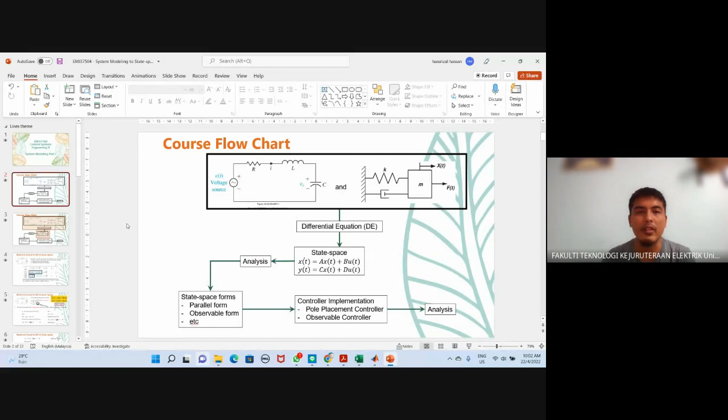All right. So last week, I can put it as system modeling part 1. This is the content that I will cover throughout the semester for my part. This is not included with Dr. Sitemani's part. And then after that, I gave you some examples for the electrical circuit, how to convert the electrical circuit to a differential equation, and then finally to the state space form. Then we went to the first example. This is the first order system.

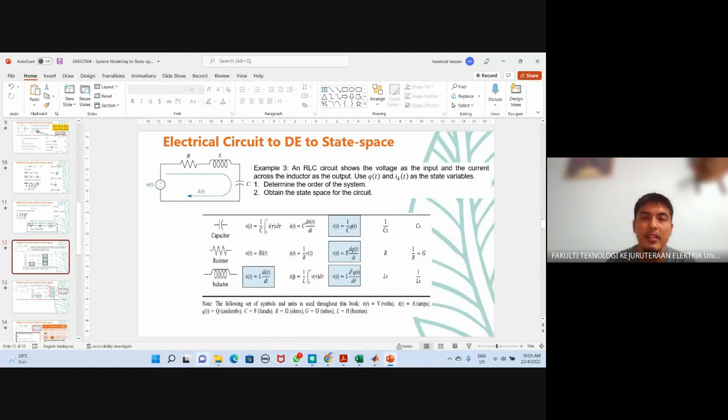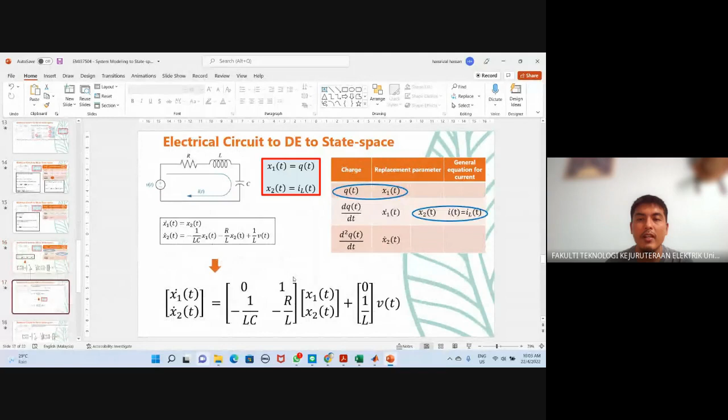And then I went to the second example, from electrical circuit to differential equation to state space. This is also a first order system. So at the end, we get this kind of state space equation. After finishing that, we went to the same electrical circuit, however, this is a second order system. So what does a second order system look like in state space form? You can see here how to convert everything. So finally, this is the answer: the electrical circuit to differential equation to state space for the second order system.

Then I proceeded with some exercises. This is the answer for exercise number 1, and this is the answer for exercise number 2. However, previously I uploaded the wrong answer scheme, so this is the correct answer for this exercise question. For how to solve it, I will upload in the Google Classroom. I also already uploaded the updated lecture slides in the Google Classroom, so you can find them there. Okay, so done for the electrical circuit.

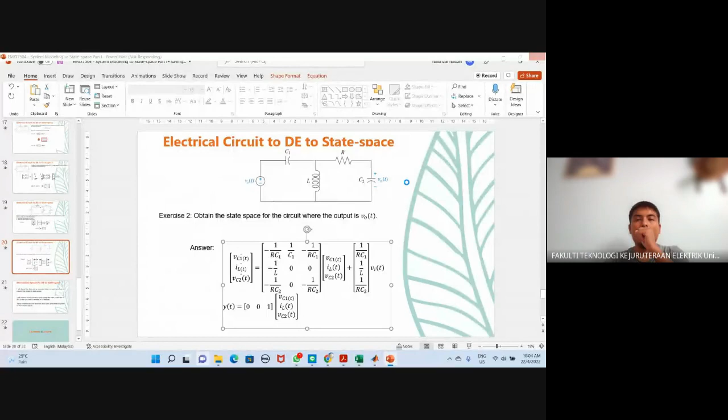This week, I would like to continue with the system modeling to state space part 2. So for system modeling part 2, we do the same thing, similar to the previous week. However, only the system is different. Previous week, we used the electrical system. In this week, I will proceed with the mechanical system with some examples and exercises.

So what have we concluded in the first lecture? In this chapter, the student will learn about the state space structure. I believe you are now familiar with the state space structure, which is x dot equal to Ax plus Bu, y equal to Cx plus Du. And what is the meaning of A, B, C, D? A, B, C, D are the matrices. X refers to the state variables vector. X dot is the differential of the state vector, and y refers to the output.

Then we go to item number 2, the modeling of the dynamic system, which is converting electrical and mechanical systems to state space form. Last week we already completed the electrical part, so this week we will continue with the mechanical part. I believe we can settle everything in the second item by today. Next, we will continue with the signal flow graph of the state equation, and finally simulation of the model system in MATLAB Simulink.

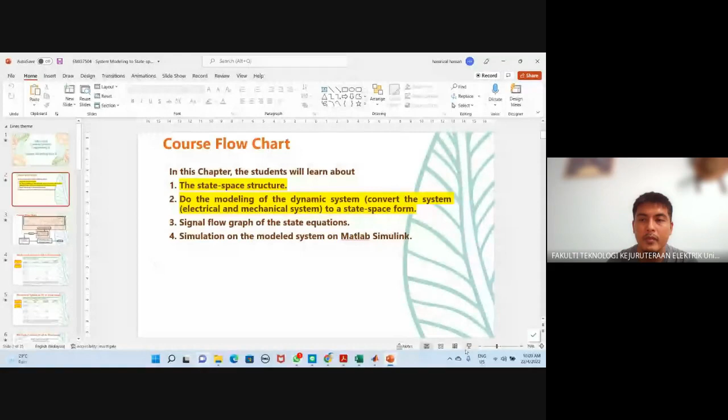Okay, so we focus on item number 2, mechanical system to state space form. This is what we need to cover for today, and this is the area that we want to cover. This was last week. This week, from mechanical, we convert to the differential equation, and finally obtain the state space.

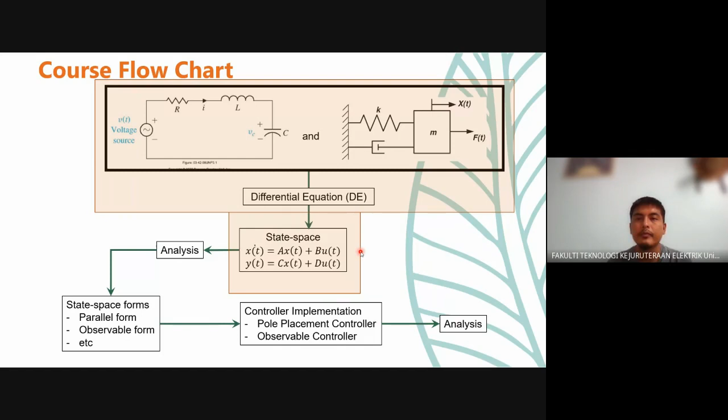Okay, so to solve or obtain the state space equation for the mechanical system, you need this table. This is the force velocity, force displacement, and impedance relationships for spring, damper, and mass. If you have a question about the spring mass damper system, you need to use this table in order to answer the question.

All right, so this is the formula we want to use regarding this table. I would like to ask... let me log in with this one to get the name. I want to ask Suman.

Suman, according to this table, which one do you need to use? Either force velocity, force displacement, or impedance, in order to obtain the state space equation. Just give me something based on your understanding of state space. What do you think? Either force velocity, this is number one. Force displacement is number two. And finally, impedance, number three.

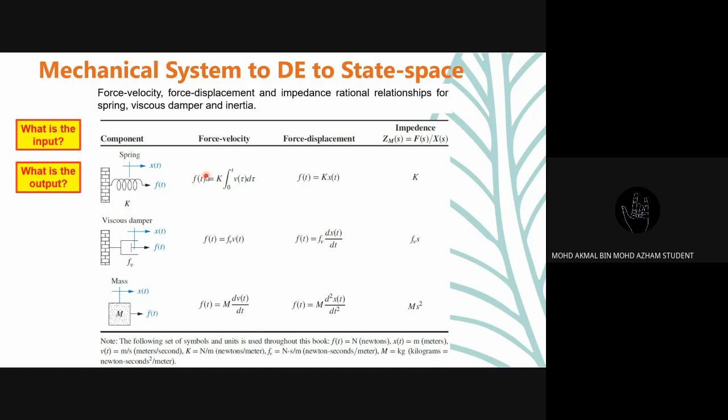Must always stay like this. However, if you give some force to the spring, you can see the spring is moving or stretching, maybe in millimeter or meter. How much is it moving? That we call the displacement, from the current location moving to the new location. And this is the normal length.

However, when you put the force, it changes. The length is changing, so how much it changes from the normal to the current length, we call as xt, or we call as displacement.

So based on that, this is the force. If you give some force, how much the force value depends on xt, and also depends on the k value. So you can see that this is xt. When you derive xt, differentiate xt, so it will give you what parameter?

Anyone? If you have xt... velocity, that's correct. So this is velocity, and this is referred to as acceleration. So this is the connection: xt, dxt over dt refers to velocity, and d square xt over dt square refers to acceleration.

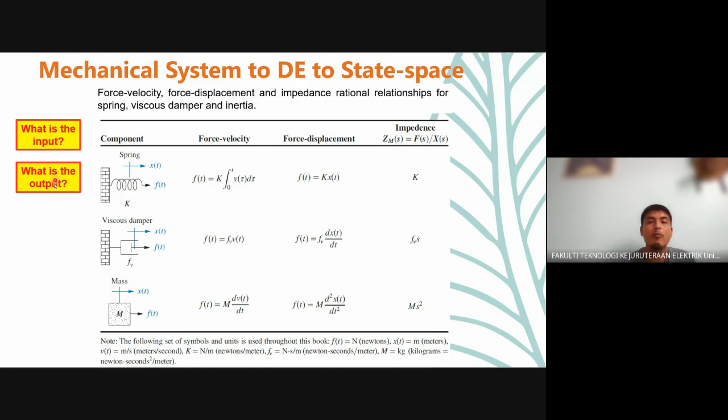So now you are clear that when you have this kind of question, you know the force is the input, and the displacement of either the spring, damper, or mass, that we call the output. All right. So similar to the mechanical system, to differential equation, to state space.

So this is our second type of mechanical system. I believe you know the answer. When you have this, the thing you need to use is the angular displacement. Torque angular displacement, all right.

So in this case, we look at the spring part. Spring part here, all right. So I would like to ask Koh Teng Sheng, which one is the input, Koh Teng Sheng, regarding this spring?

TT. Yeah, so normally if FT is the force, then TT, what is the name of the parameter? Torque. Okay, if anything involved in the rotation, the input that we give to any rotation, the name is torque.

And then, I believe if in rotation, the changing from the current to the new position must be in the theta angle, is it? So theta, the angle, is the output. This is the thing you must be clear about before you proceed to convert from the mechanical system to the state space. I believe you understand that.

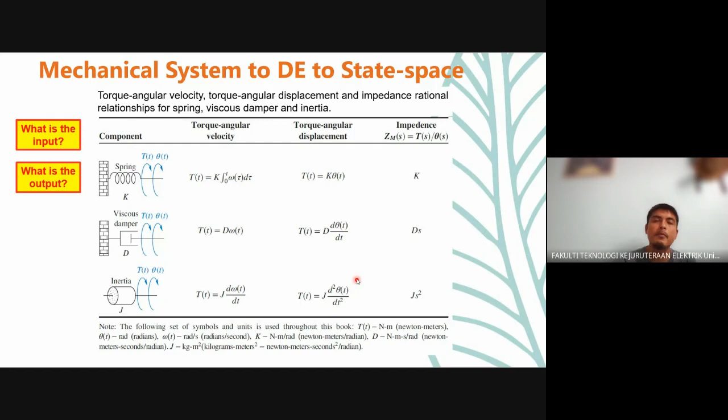So this is similar. If this is theta, the angle, how much the angle changes after you give the input to the system, the input is torque. And then for the damper, this is the angular velocity here, and this is referred to as the angular acceleration.

So now we go to the first example. This is the spring mass damper. This is force, because force only applies in the linear direction, so that's why we call the input a force.

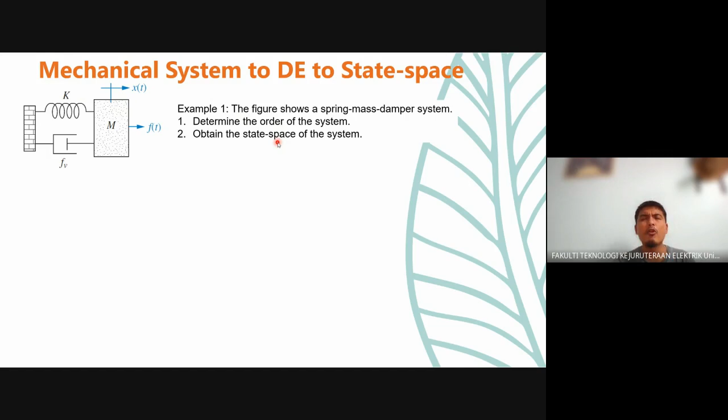So the figure shows a spring mass damper system. Determine the order of the system. So how do you want to determine the order of the system? And then the second question: obtain the state space of the system.

Before we determine the order of the system, we must know we need to use this table in order to solve, or design, or convert our system to state space. So this is a spring mass damper, and we know that we need to use the force displacement formula.

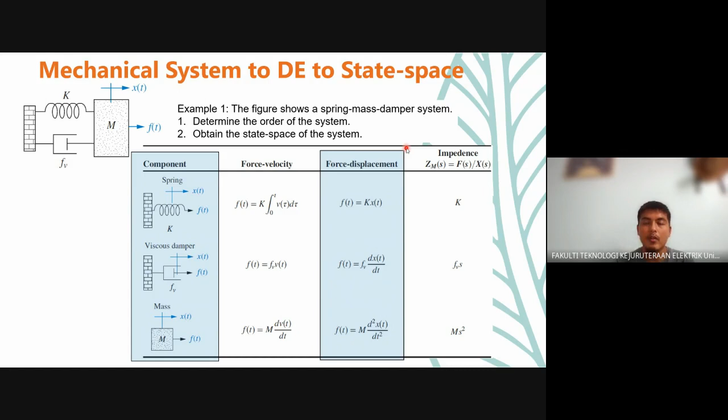So after that, we shortlist the formula, same procedure as the previous one. After we shortlist the formula, you look at the spring. We have spring here, we have damper, and we have mass.

And this is our target, to obtain the state space equation: x dot t equal to a xt plus b ut, and yt equal to c xt plus d ut. I hope you will appreciate this when I do the demonstration on Simulink later, then you will know, oh, this is the thing, it gives you what. I hope so.

So you have these three items here: M, K, and FV. So this is the thing, so how do you want to determine the order of the system? So you know that the input is the FT force, and then the output is the XT.

The order of the system is a second order system, since the highest derivative in the formula is 2. So for the mechanical system, you look at the highest derivative in the shortlisted formula. In this case, the highest is d square xt over dt square, so it means the order of the system is second order.

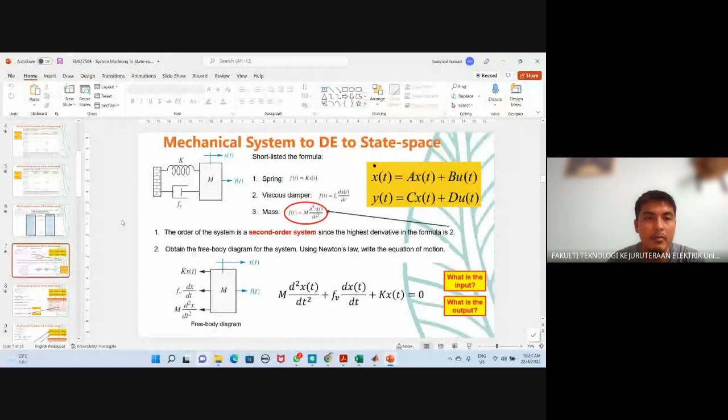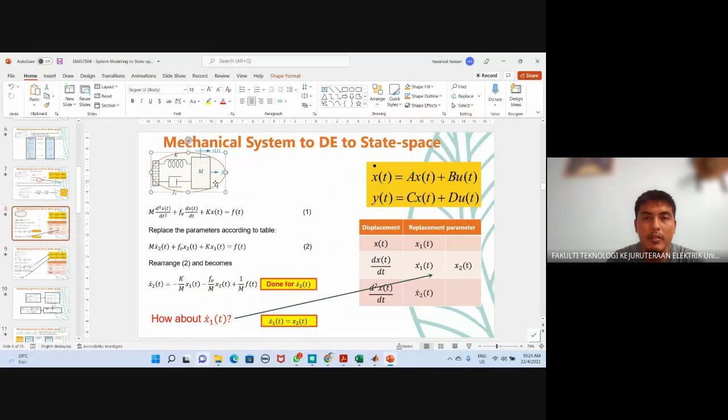Okay, so in this case I need to show you something. This one, not this one. Let me remove the animation for this one. Alright, so this is a question.

Firstly, this is the location of the force. The force attached to the mass. So in order to do the free body diagram, you need to find any items that attach with the mass, because mass is the place where the force is given. The force is given at the mass, then you need to find whatever attached to the mass.

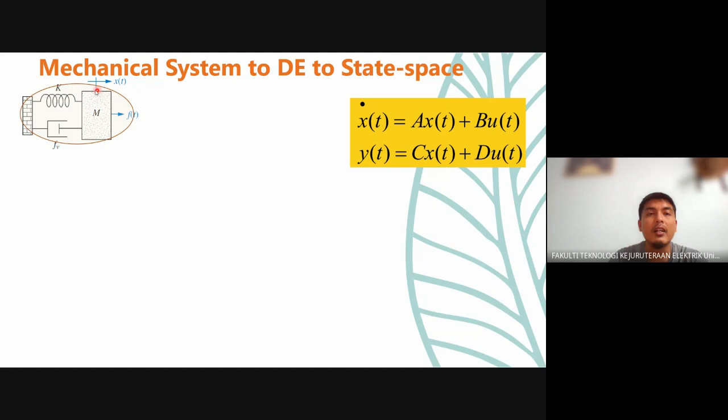In this case, the things attached to the mass are the spring and damper. So if you give some force to the mass, the spring and damper also will be affected. It's not only the mass that's affected, so it means the position of the mass, and also the position of the spring and damper, will change, because these two things are attached to the mass.

So that's why you can see that for the mass here, the mass, the damper, and the spring are affected when you give the input to the system. If you give input to the system here, the affected things are mass, spring, and damper.

So that's why this thing wants to make sure it returns back to the current position. That's the characteristic of the spring mass damper system, they want to return to their current position. So that's why, if you give force to the mass, the direction of the force for the spring and the damper must be opposite, because this force wants to return back to the current position. So this is how we come up with the free body diagram.

So based on this, according to Newton's law, we need to write this equation. The summation of the force equals zero according to Newton's law. So this is the force for the spring, this is the force for the damper, this is the force for the mass, and this is the force of the input. So that's why we get...

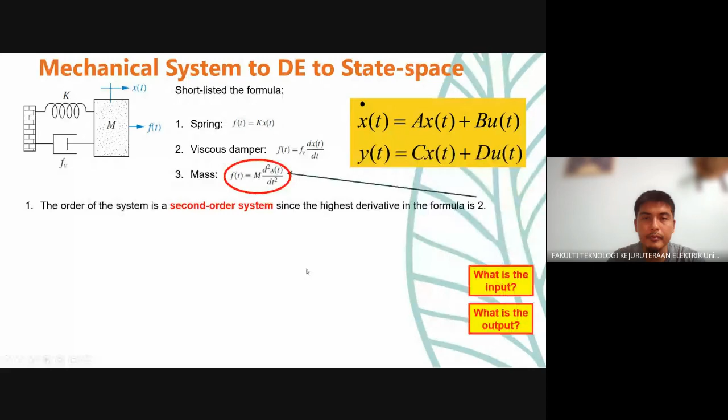No, this one. Actually this is referred to F equal to F, right? So you can see that the force of the mass here, plus the force of the damper, plus the force of the spring, equal to the force of the input. How many of them? 1, 2, 3, 4. So that's why we have 1, 2, 3, and 4. So this is the Newton's law of the force.

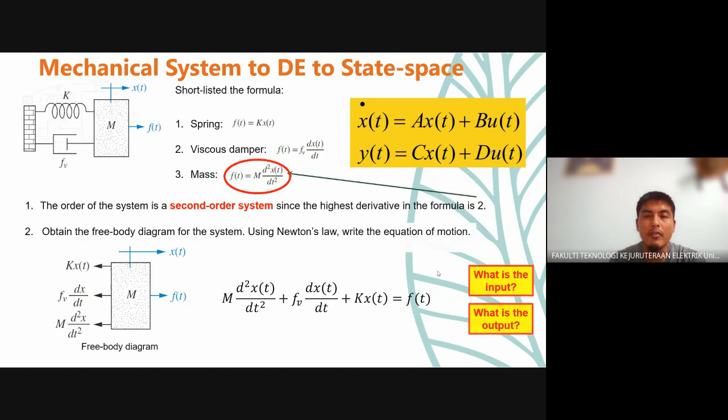Okay, so based on the equation, we need to replace the parameters according to the table you learned last week. So this is the parameter: you have xt, dxt over dt, and d square xt over dt square. And then after that, we just name xt equal to x1t.

And then after that, when we derive x1t here, that's why we come to x1 dot t. x1 dot t we can also name as x2t. And the x2t, when we do the derivation, up to x2 dot t.

So I would like to ask Ari Mugen: why did we not replace x2 dot t as equal to x3? Ari Mugen, what is your answer? Why did we just stop until x2 dot t? Why did we not replace up to x3t?

So, Ari Mugen. Are you there, Ari Mugen? Just answer yes or no. Godri, what's your answer, Godri?

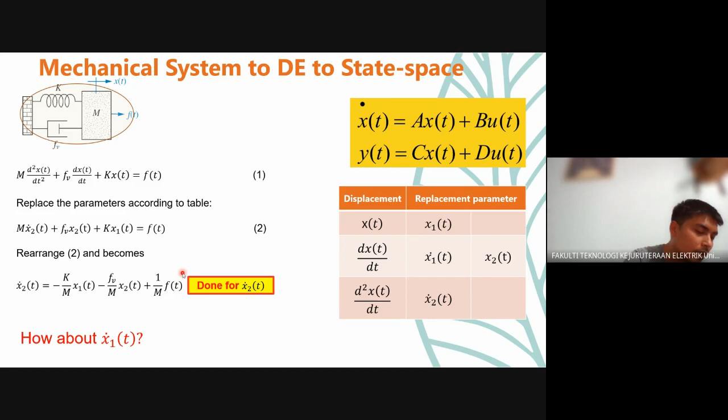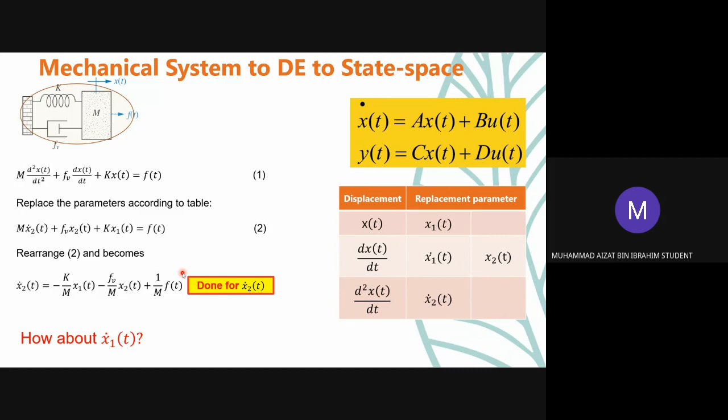How about x1 dot t? Anyone would like to guess what x1 dot t is equal to? Muhammad Aizat bin Ibrahim, x1 dot t equal to what, Aizat? X2? Yes, that's correct. How do you get x1 dot t equal to x2, Aizat? Based on the table, replacement parameter. Yes, that's correct. That's why this part of the table is really important, in order for you to obtain this one. So you get x1 dot t equal to x2(t).

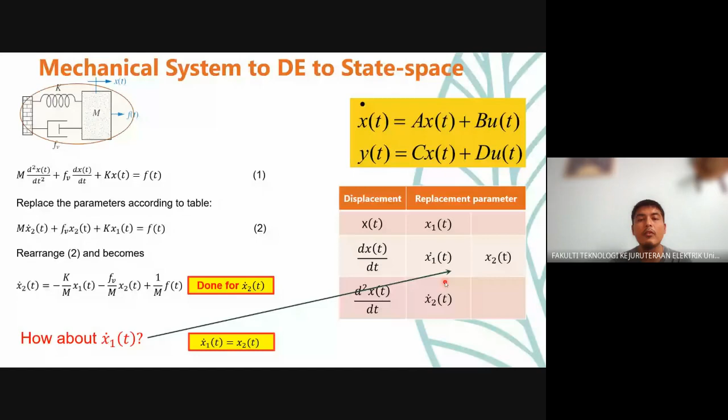All right. So according to this, x1 dot t equal to x2(t), x2 dot t equal to negative k over m x1(t) minus this thing, right? Then we need to convert to the state space form. So we have x1 dot t, x2(t) here. Since x1 dot t only equals x2(t), here becomes 0 and 1, because 0 multiplied with x1(t) becomes 0, plus 1 multiplied with x2 becomes x2(t), plus 0 multiplied with f(t) will be 0. So here x1 dot t equals x2(t).

All right. And then for the x2 part, negative k over m multiplied with x1(t) plus negative fv over m multiplied with x2(t) plus 1 over m multiplied with f(t). So this is how we convert from these two equations to a state space form.

And then from the figure, we know that the output is x(t). As you already know, before you answer the question, you must know what the input and the output are. The output is x(t). From the table, x(t) equals x1(t). So that's why we got y(t) equal to x1(t). So finally, this is our y(t) equation: y(t) equal to 1 multiplied by x1(t), plus 0 multiplied by x2(t) becomes 0. So we get y(t) equal to x1(t).

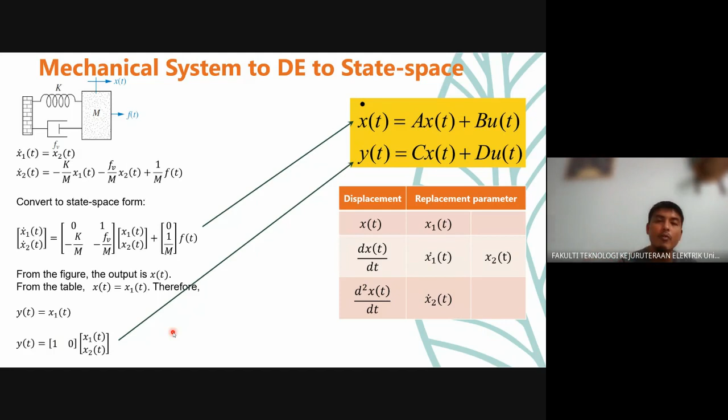Okay, so in conclusion, if you have a mechanical system you want to convert to state space: first, you have the mechanical system here, and you need to convert it to the free body diagram. After that, you obtain the differential equation. And finally, based on the differential equation, you compute the state space equation.

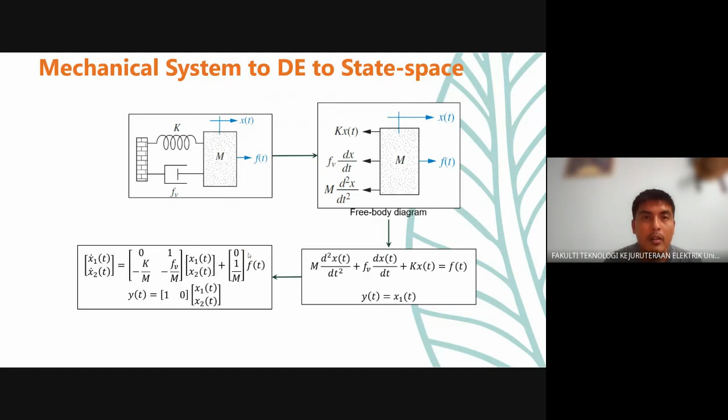Okay, firstly, you need to determine what is the input. Nurul Farhanah Nasuha, what is the input? Oh, you answer in the chat box. Let me check the chat. Okay, I just read your answer. Alright. Okay, Nurul Farhana Nasuha, what is the input for this question? Okay. Lavenya, what is the input, Lavenya?

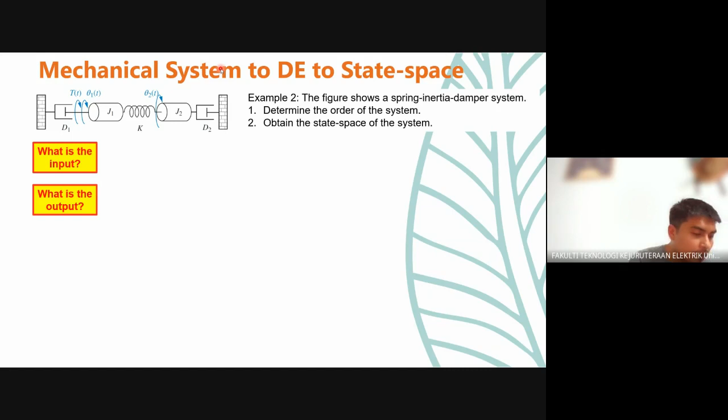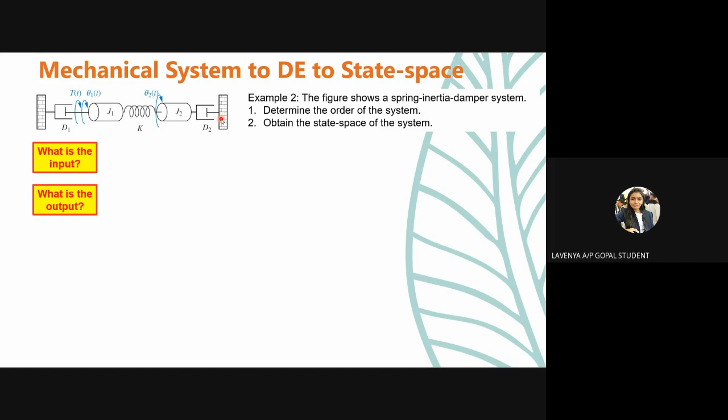Torque T(t). Yeah, that's correct. Okay, thank you for the answer. So the input is a torque, Nurul Farhana. Okay, so Lavenya, what is the output based on this figure? The theta. Okay, can you name it? Because there are two thetas here. So which theta, Lavenya? Theta 1. Do you have any output you would like to add, Lavenya? And theta 2. Yes, that's correct.

So in this case, you can see that there are two outputs here, theta 1 and also theta 2. Previously we saw only one output. However, in this example, you have only one input, but two outputs. So we can call this system single input, multiple output, SIMO. Okay, so this is really important before you proceed to answer the question.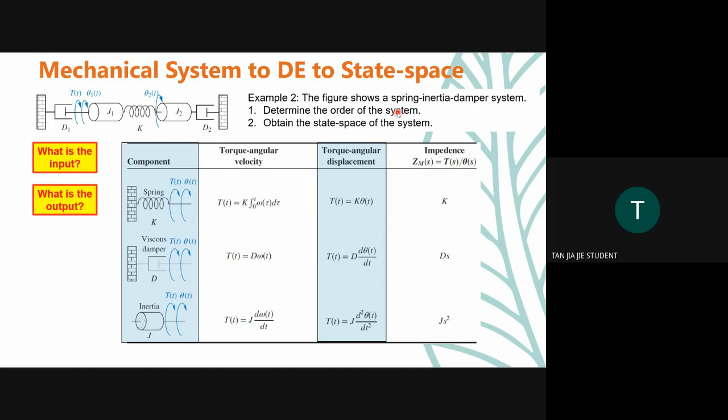Oh, Tan Jia Jie, Osama and Tan Jia Jie. What is the order of the system? Hello. Yes, is this Tan Jia Jie? Yes. Okay, what is the order? Second order. Second order, would you like to change your answer? No. Okay, all right. Second order, Osama also said second order. However, I would like to tell you that this is not a second order system. Anyone would like to guess what is the order of the system?

First. First order. Okay, let's see. Mio, Muhammad Firdaus, and Melvin. Mio and Melvin, what do you think about the order of the system? Let me see in the chat box. Did you give an answer in the chat box? Okay, Mio.

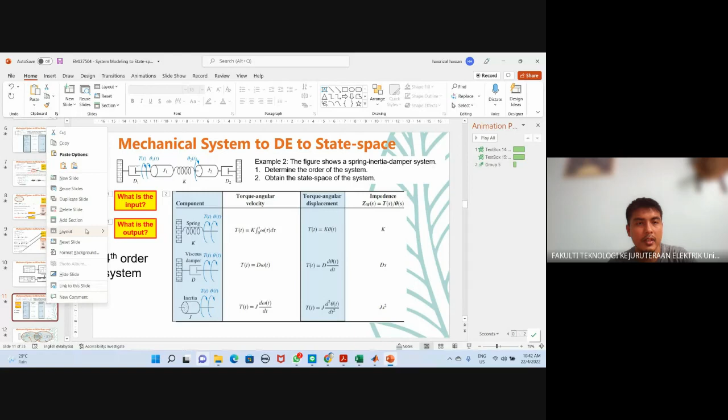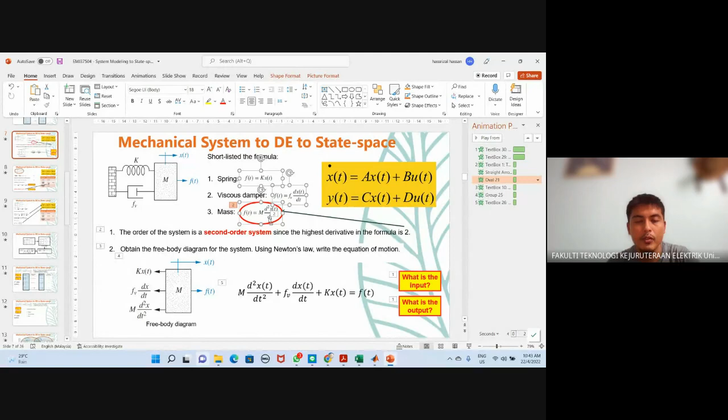Okay. So as usual, you need to determine the order of the system. As usual, you need to shortlist the formula. So I need to copy this one and put it here. We need to do the shortlist. I need to duplicate this one and remove this thing. Shortlist the formula. And then copy everything here. Control copy again. Put it back. Okay.

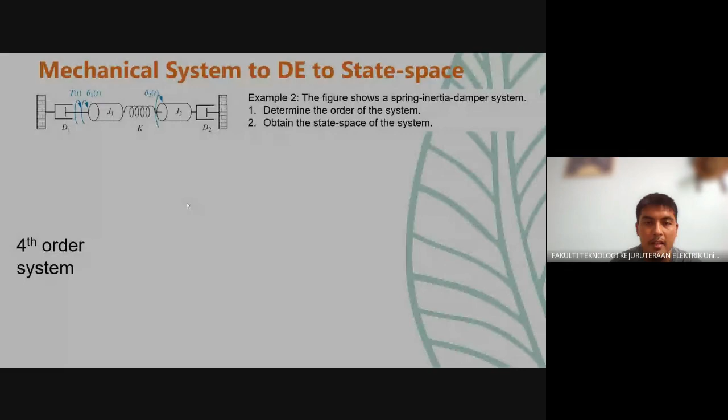So according to this table, the highest derivative between these three elements is the inertia. So when you look at this question, you look at how many inertias and outputs you have. Firstly, you have two outputs. So if you have two outputs, okay, you have shortlisted the formula, you have the two outputs. So I need to insert the equation.

You have theta 1T, and then you have the other one. Control copy, control V, you have theta 2T. Okay. At the theta 1T region, the highest parameter or subject is J1. So it means that the highest here will be

you have J1 d square theta 1T over dt square. I need to make it bigger after this. T square. Okay. Control Z. For the first output.

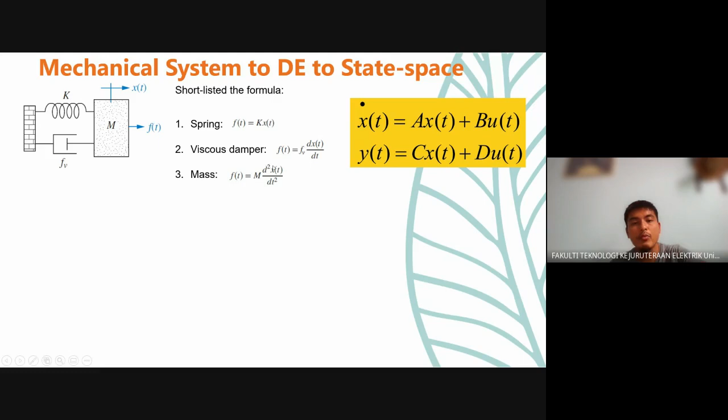Before this, I mentioned how you determine the order of the system. You look at the highest derivative in the shortlisted formula. So the highest is only d square x(t) over dt square, only one. Only this is second order. So that's why this is a second order system.

However, in this case, there are two outputs, theta 1 and theta 2. This is the highest for theta 1, and this is the highest for theta 2. So 2 plus 2 becomes a fourth order system. So this is how you determine the order of the system. You look at how many outputs there are. If one, mostly you will get a second order system, but now we have two outputs.

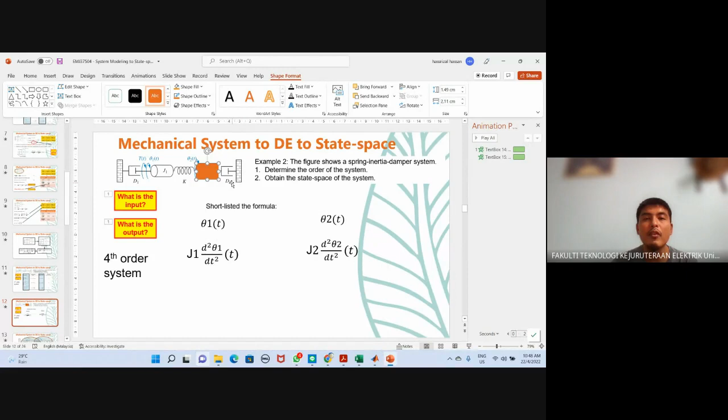Then we look at the highest parameter or subject. We have J2, so that's why we call it second order. For example, let's say we didn't have J2. Then for output number 2, you only have K and D2. So for output number 2, the highest is D2, according to the table formula.

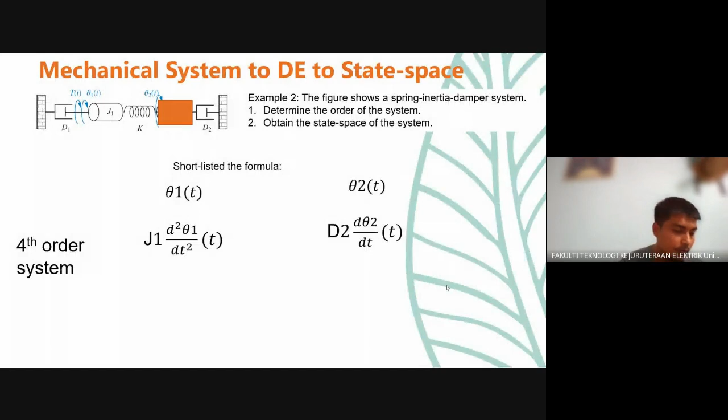So what is the order of the system now? Okay, anyone who said third order system, that's correct. Because in this second output, we only have spring and damper. Between these two, the damper gives the highest derivative, which is d to the power of 1. So here we have 2 plus 1, which becomes a third order system.

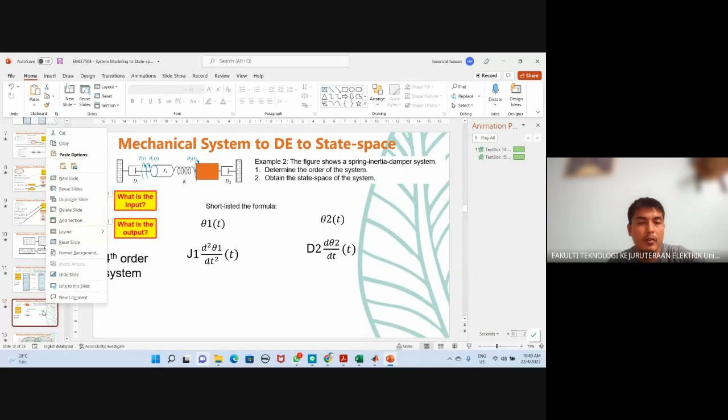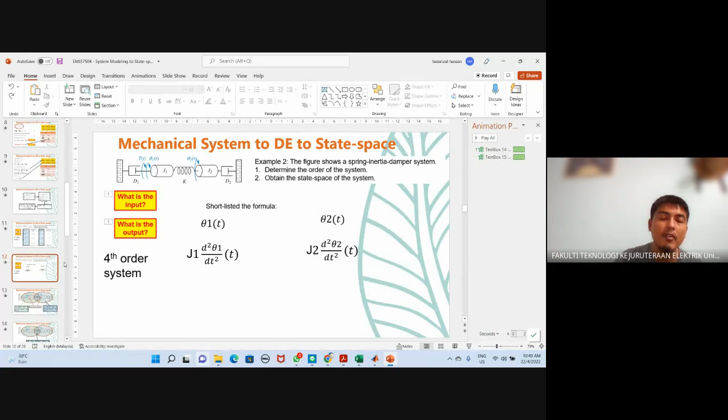Okay, so now we need to return to the original question. I need to duplicate this slide. Okay. So now you know that this is a fourth order system. When you have a fourth order system, you can expect that your state space will be up to x1 dot, x2 dot, x3 dot, x4 dot. You will not have x5. You only have up to x4 dot.

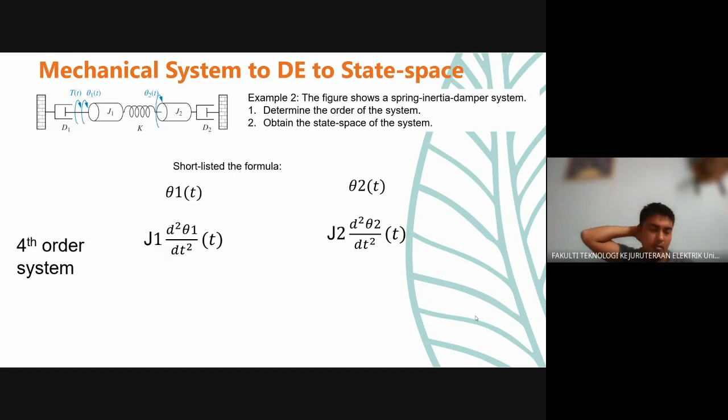And you already know the input and output, and that the order of the system is fourth order. So firstly, you need to convert the system to a free body diagram. You can see the location of the outputs: theta 1 attached to J1, and theta 2 attached to J2. Okay, so now we need to focus on theta 1 first.

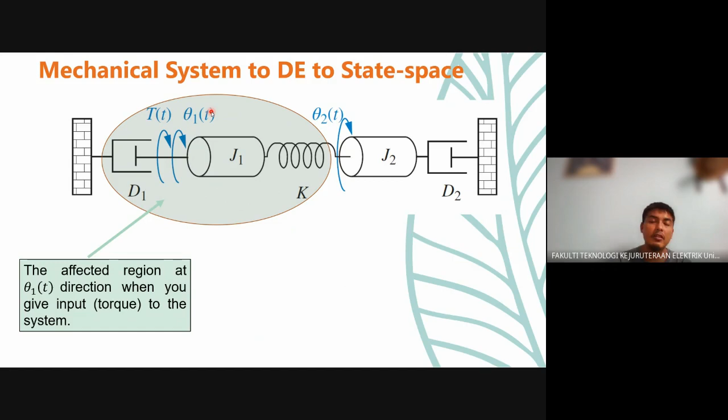Look at whatever parameters attach to J1. The parameters that attach to J1 are D1 and K. So when you give input torque to the system, the affected area involved in the theta 1t output direction is only these three parameters for this question: J1, D1, and K. So now we know this is the area affected for theta 1t.

Next, we look at the second output, theta 2t. The affected region that changes in the theta 2 direction when you give input to the system is K, J2, and D2, because K and D2 are attached to J2. So this is the region of theta 1, and this is the region of output theta 2. However, this is the overlap region, the region affected in both the theta 1 and theta 2 directions when you give input to the system. I will explain what this means.

Okay. So now we want to focus on this area, theta 1. Free body diagram. When we give the input to the system, look at what happened or changed at this region first. When you look at this region, how many items are connected in this region? You have J1, you have D1, you have K, you have input T(t), and then you have the theta 1(t) direction. So how many? 1, 2, 3, and 4. So you look at this area, you have 1, 2, 3, and 4.

Okay. If you give the input in this direction, let's say counterclockwise, as I mentioned before, the system would like to maintain its original position. So that's why when you give the input here, the response torque for this system must be opposite to the input, because it wants to maintain its original position. So that's why the direction will be clockwise. If you give the input counterclockwise, the reaction direction must be opposite. In this case, it is clockwise. So that's why the direction of J1, K and D1 here are different from the input.

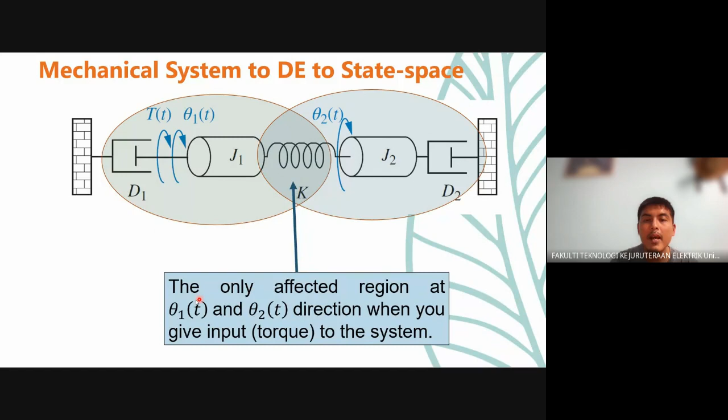Okay. However, according to the previous slide, only K is affected by theta 1 and theta 2. So that's why we need to also consider this K that is also affected by theta 2. This is already affected by theta 1. According to the previous slide, this is the overlap region. This region will also be affected by theta 2. So that's why we have this second free body diagram for theta 2 here. So you can see that the direction here is similar to the torque input.

Okay, so according to this free body diagram, we just come out with the equation. You can choose any, but in this example, I choose clockwise direction positive, counterclockwise direction negative. So anything clockwise: J1, this one, plus number 2, plus K theta 1(t). This is counterclockwise, that's why I put negative T(t). This is counterclockwise, that's why I put negative K theta 2(t) equal to 0. So that's why we have 1, 2, 3, 4, 5.

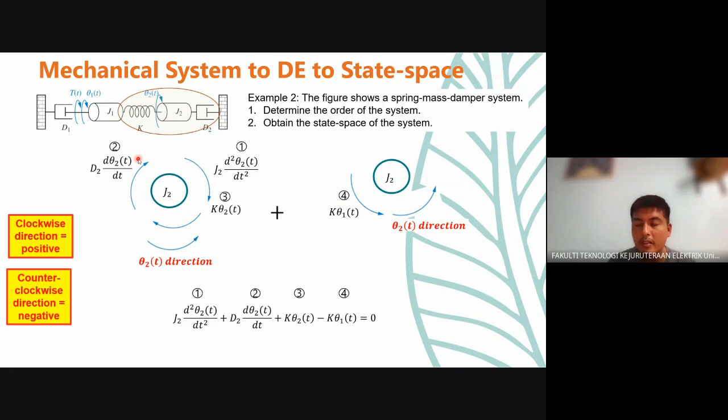Okay, and then after that, you come up with Newton's equation. So this is number 1, number 2, number 3, and number 4. Number 4 is negative because it's counterclockwise, and the rest are clockwise. So finally, you got the first equation and second equation. This is the first region. The second refers to the second region.

Okay, so after that, we have theta 1, d theta 1(t) over dt, d squared theta 1(t) over dt squared. And then we have theta 2, d theta 2(t) over dt, d squared theta 2(t) over dt squared. Then we need to come up with a table. So you have theta 1(t), d theta 1(t) over dt, d squared theta 1(t) over dt squared, then theta 2(t), d theta 2(t) over dt, and finally d squared theta 2(t) over dt squared. And then you just do the replacement. Theta 1(t) equal to x1(t).

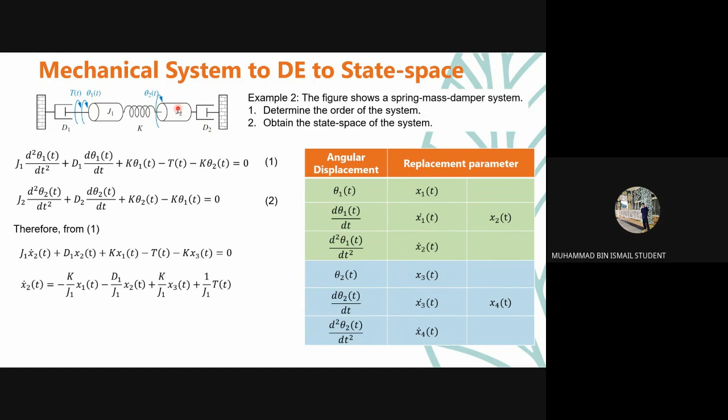Doctor. Doctor, take the mic. Alright, thank you for letting me know. Okay, so proceed again.

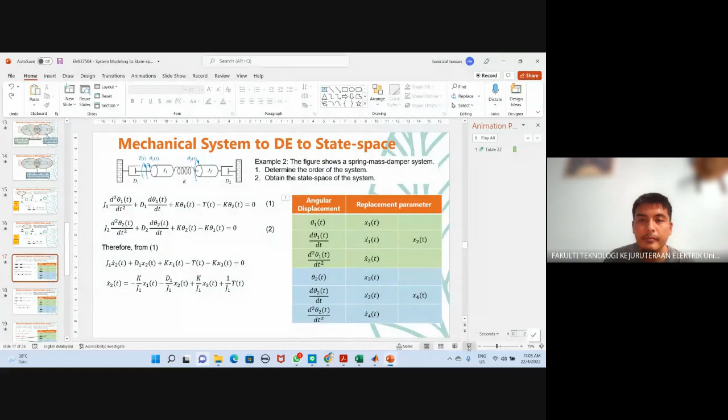Okay, according to this table, for the first output the highest is J1, so that's why we stop until x2 dot t. We did not proceed with x2 dot t equal to x3 because we just refer to the first region. The green refers to the first region here. And then after that, the blue part here, we focus on the second region. In the second region, the highest is J2. That's why we stop until x4 dot t. So for this table, we need to separate it between these two regions.

So let's say in this case, if you have three outputs, you have theta 1, theta 2, and also theta 3. The highest possible order of the system will be a 6th order system. And then for this table, you will have three parts: the first part, second part, and then the third output, the third part. And then after that, you will stop until x6 dot t. So this is how we convert from this differential equation to the table.

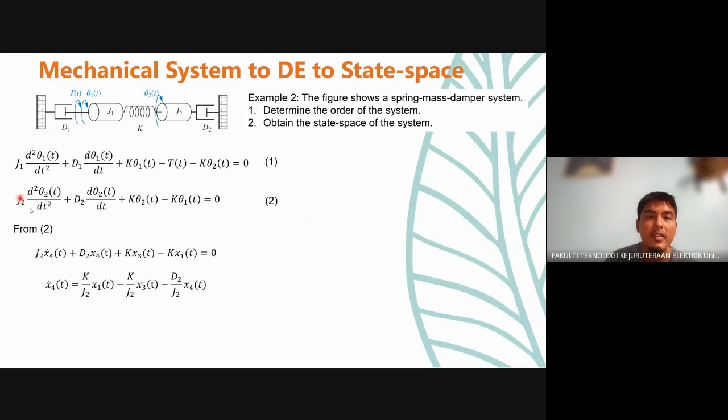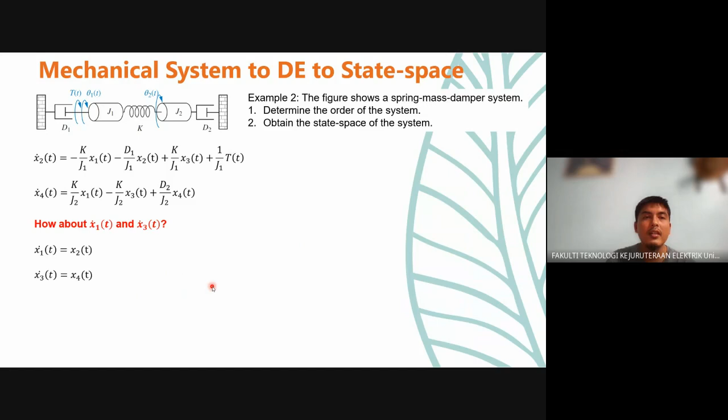And after that, you do the replacement. Finally, you obtain that x2 dot t equals this value for the first region. Okay, and then after that, we proceed with the same procedure for the second region, and we just need to refer to the same table and obtain x4 dot t, and this is the answer. And finally, this is for x2 dot and x4 dot.

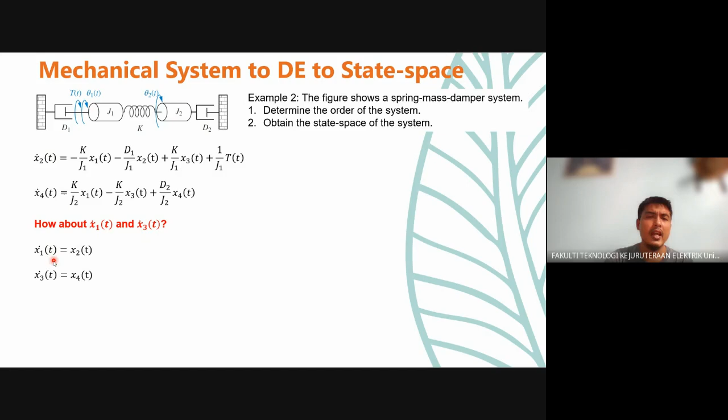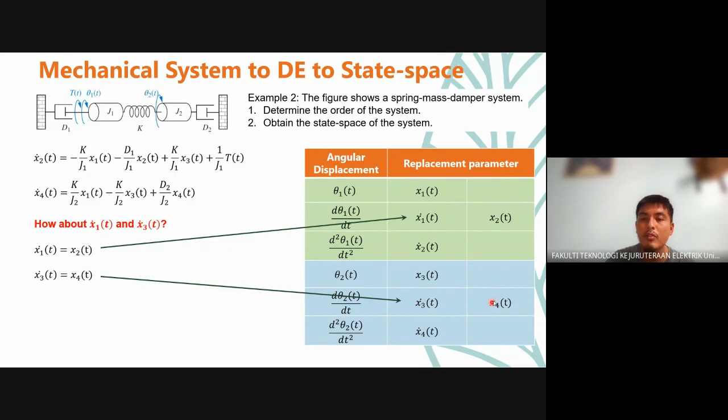So how about x1 dot t and x3 dot t? Because we only have x2 dot t and x4 dot t. So to get x1 dot t and x3 dot t, as usual, we just need to refer to the table. In this case, x1 dot t equals x2 t and x3 dot t equals x4 t. So finally, after you obtain that, this is x1 dot t, x2 dot t, x3 dot t, x4 dot t. So you convert to the state space form.

You know that x1 dot t equals x2. So x1 dot t equals 0 multiplied with x1, 0. 1 multiplied with x2, x2. 0 multiplied with x3 will be 0. 0 multiplied with x4 is 0. 0 multiplied with the input T(t), 0. So you get that x1 dot t equals x2 t only here.

Similarly for x2 dot t, you have x1, x2, x3, and T(t). So that's why you have entries at x1, x2, x3, and also T(t). For x3 dot t, you have only the x4 part as 1, the rest is 0. And also for x4 dot t, you have entries at x1, x3, and x4, and the rest are zeros.

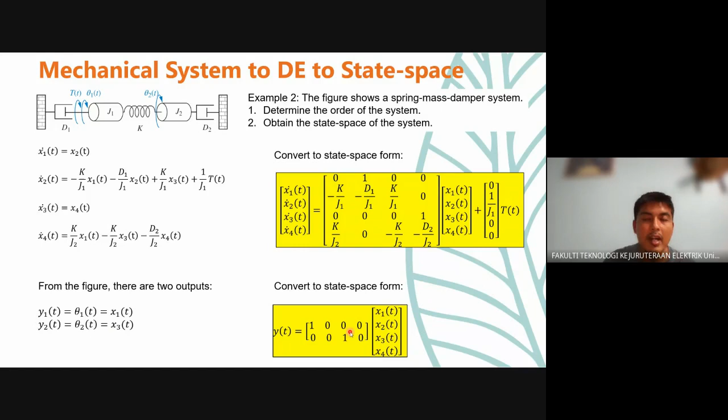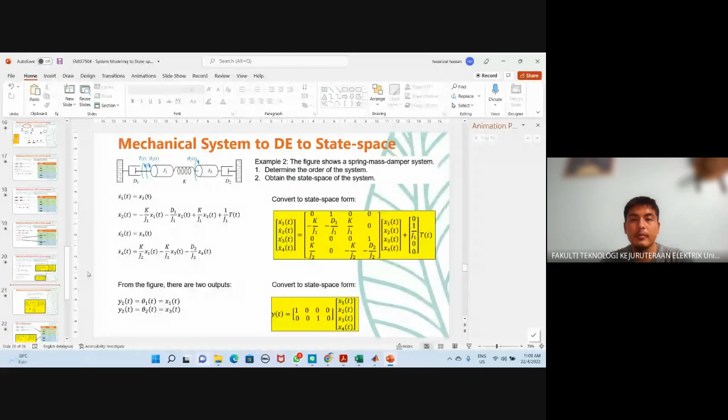So in conclusion, based on the system, when we convert to the state space form, this is the answer. This is our A matrix. I need to change it to this one. Copy. Okay, what is this? From there. I'm not sure. So, okay, you have this answer. This is X dot. This is the A matrix. This is X. This is B. This is C, and X. Later on, it's really important for you to know your A, B, C, and D matrices, because you will use all the information for further analysis.

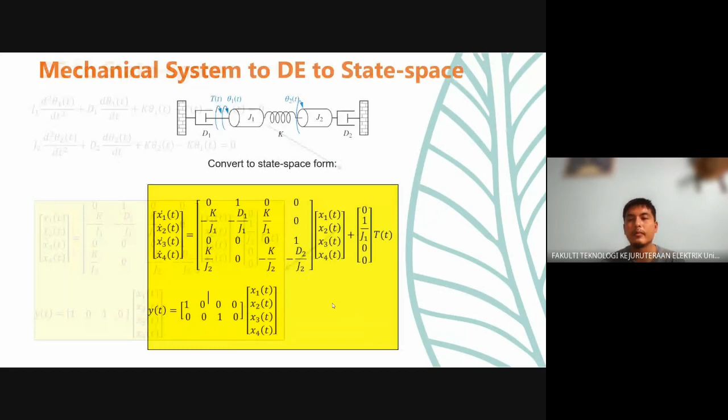So in conclusion, okay. Okay. So far, how is it for the mechanical system to state space?

Can you follow? Syamil, Muhammad Syamil bin Muhammad Nabi. Yes, yes, Doctor. Alright, Azrul Naif, sorry, Azrul Hanif. Can you follow, Azrul Hanif? Kushon Wayne. Thank you, Azrul. Kushen Wayne, sorry. You can follow? Yes, doctor.

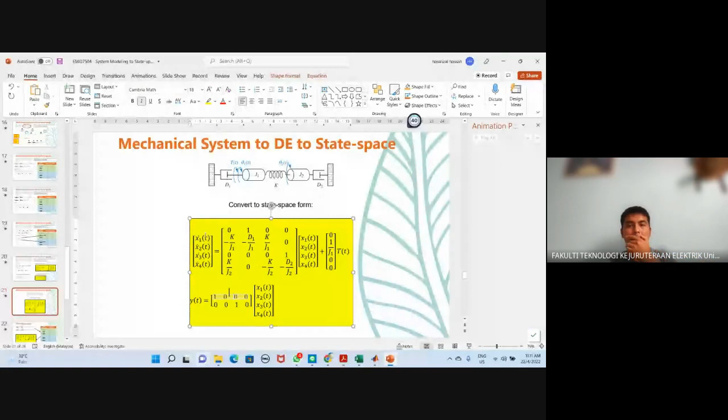Okay, then for the mechanical system, converting the differential equation to state space is the last part to do the modeling. Actually, you already learned how to convert from the differential equation to state space.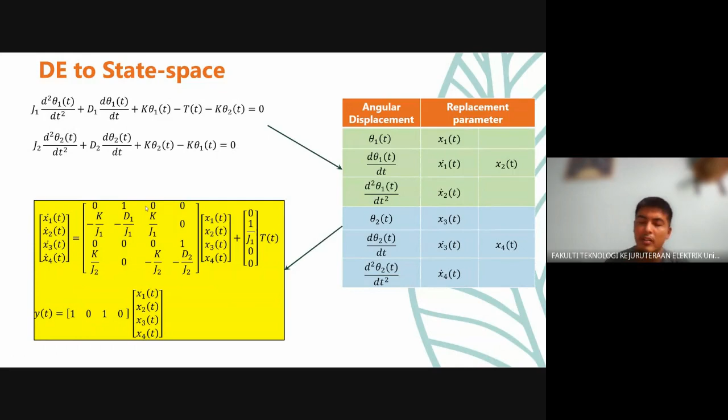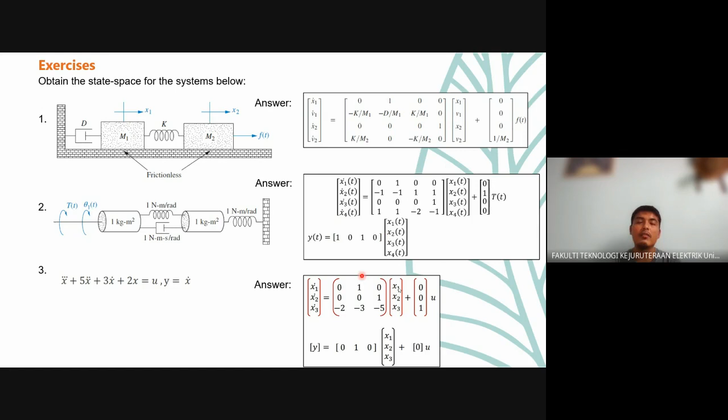All right, so for you to do more exercise examples, you can find more in this textbook. Just click this link using your UniMAP email, and then you can refer to the textbook I provided in this link to do more practice examples and exercises.